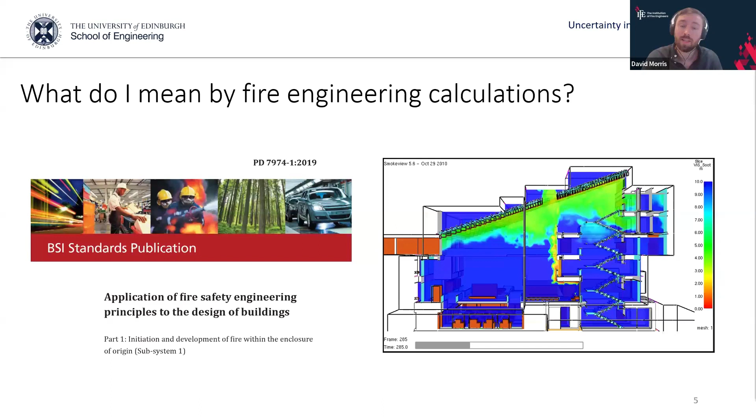So the idea today is to go through two broad categories of fire engineering tools. We'll focus one on what we'll call simple correlations or correlations and simple models, and in particular I'll be going through the example of flashover correlations. These are the kinds of things that you might see presented in codes and literature, but in particular we'll be looking at flashover. And the second category being largely what we'll call complex analysis, such as what are the inputs that we use for something like a CFD model.

In particular, we'll be looking at the variability in heat release rate data as an input to additional analysis. Everything I'm presenting today are tools that I've used in some capacity with some experience as an engineer. And then I've also had the opportunity to now get a bit of a research perspective in terms of laboratory experiments. So hopefully this is an intersection between the use of these tools as an engineer, but also a bit of experience looking at it from an uncertainty and research perspective.

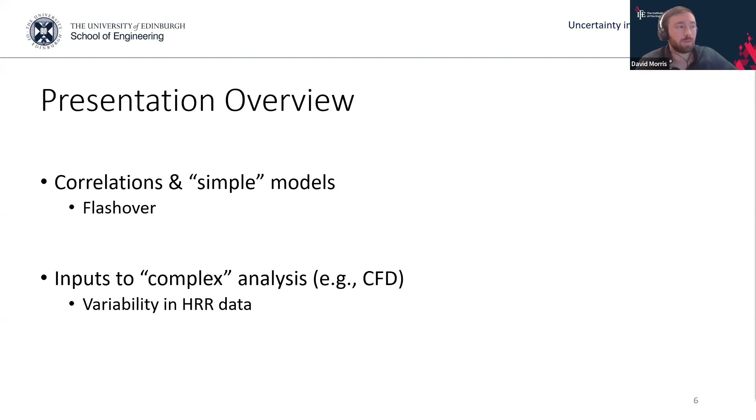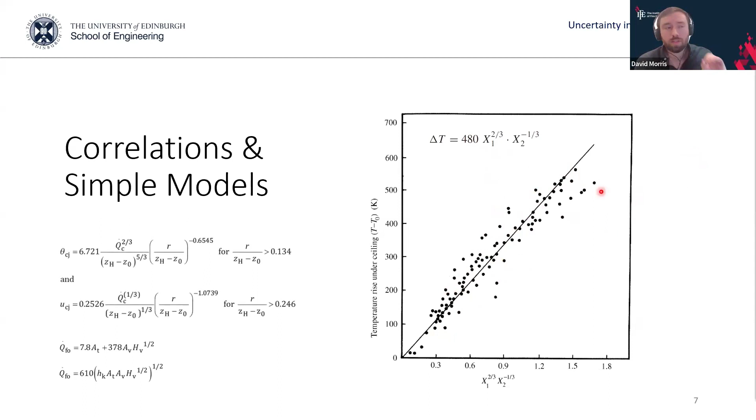And so if you recall some of the examples that I referenced from BS 7974, there are other kinds of correlations that we might come across, right? So now let's actually look at this degree of scatter around some of these correlations. Let's try to quantify something like an error bar on one of these correlations.

And today we'll be focusing on the concept of flashover in terms of this correlation. And I'm sure many people here are very familiar with the concept of flashover, but flashover is that sort of proverbial transition from a room in a fire, a fire in a room, to a room on fire, right? And what that means is basically you go from a localized fire, usually a single item or a few fuel packages burning, and then based on the ventilation conditions of the room, you eventually transition to a point where all of the fuel in the room has ignited.

And so the process of flashover is controlled by this complex interplay between the ventilation conditions and the development of a smoke layer, which acts to heat the remaining fuel in the compartment. And we won't go into too much detail about the interplay of all these different phenomena, but on a simple level, we can say because flashover is linked to this idea of ventilation, you are able to then predict the onset of flashover by identifying this ventilation factor.

Now, the benefit of the ventilation factor is that this is based on the geometry of the compartment alone. It has nothing to do with the fire inside the compartment or the fuel inside the compartment. It is purely a function of the openings of the compartment, right? And so this is a useful tool in correlating the onset of this flashover.

And the output that we're going to be looking at is we like to look at this threshold flashover using the fire size, right? So that's, again, the heat release rate, probably terminology that many people are familiar with. It's your fire size, right? It's the rate of energy release. It's in units of power. It's the kilowatts, megawatts of the fire.

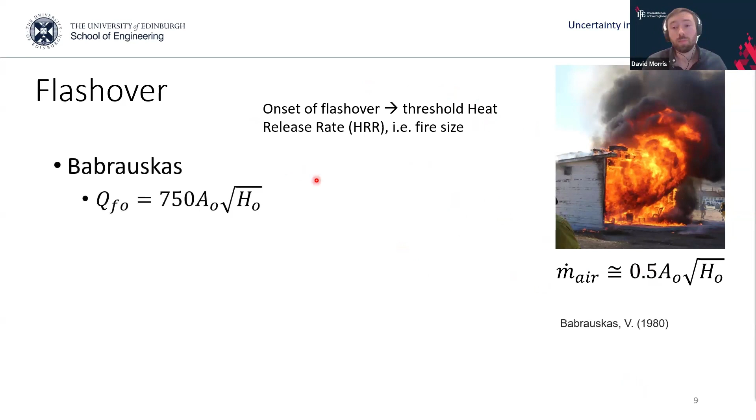And so there are simple correlations that exist that correlate the onset of flashover in terms of a heat release rate to this ventilation factor. One of which is the correlation presented by Babrauskas, as seen here as a simple sort of linear relationship between your ventilation factor and the heat release rate at flashover.

You also have the MQH correlation, a very similar formulation. You see the ventilation factor nested in it with a few other terms, and you have the Thomas correlation. Again, in each case, you see the ventilation factor sort of cropping up in the correlations themselves.

I've used the Babrauskas correlation, for example, in a few projects in the US and Australia. Also, the MQH and the Thomas correlation are both referenced in BS 7974 as potential methods for looking at the flashover potential of a compartment.

Now, irrespective of the differences between the correlations, right? Let's just look at, for example, the Babrauskas correlation alone. Just looking at this correlation, right? You can theoretically put a single input into this and get a single output, but looking at the equation on its own doesn't give us any fundamental insight really into what's my level of confidence in this output, right? I have one input, I get one output, right?

But what are my error bars on that? Do we have an idea of what the range might be? What limit do I have on putting a ventilation factor in here to begin with? Can I use this for all size compartments? Is there only a certain range of compartment sizes I can use this for? So these kind of questions start to crop up as we start looking more and more into these equations.

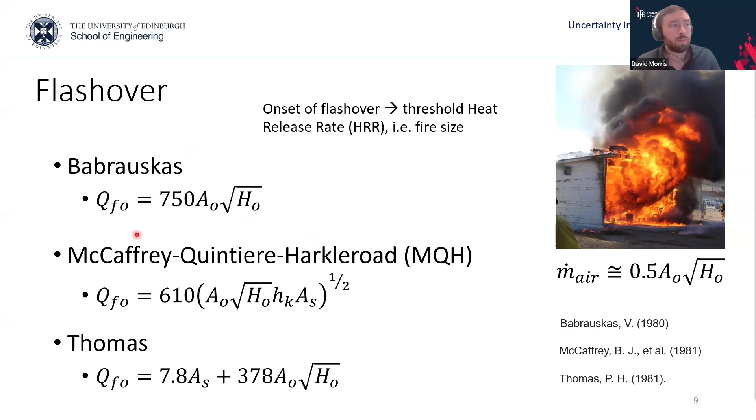So let's break down the Babrauskas correlation a little bit in detail.

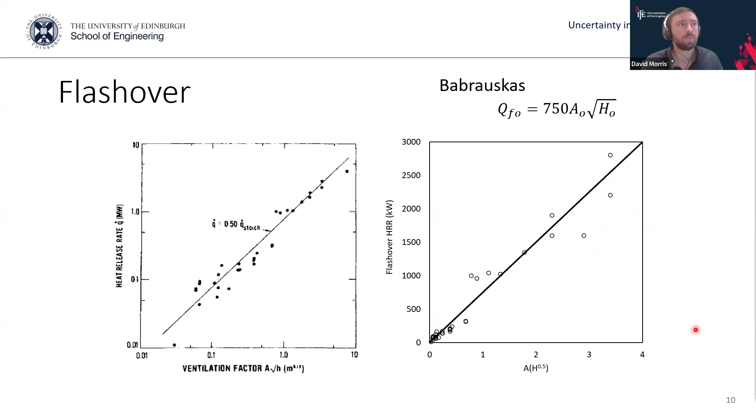Now, I'm going to break up the idea of uncertainties into two categories. The first category is statistical variation, right, these are the error bars I've been talking about.

As we can see, there's a degree of scatter around this correlation, and this can be calculated by taking a regression analysis of the data and the correlation, taking a 95% confidence interval between the difference of the data and the correlation itself. In other words, with 95% confidence, we can put error bars around the correlation and say that our original correlation has a plus or minus of about 520 kilowatts with 95% confidence.

There are multiple different ways that we can articulate these error bars, but this is just one approach. The benefit is that with the data, we can start to say these are the bounds of values we might expect based upon the experimental data, so we can actually start to articulate confidence in this calculation. So that's the error bars.

This is the second part of this uncertainty to look at. It's worth noting that this correlation was only determined over a certain range of ventilation factors, so in theory we have no idea what happens beyond the data that was actually collected. While there might be a physical basis to extrapolate beyond the ventilation factors that were experimented, without the data to back it up, the correlation is only as good as the range of values used to create it. So we have no idea what's going to happen afterwards without the data to back it up. The whole idea is to look at this as the range of ventilation factors that we can actually apply to this particular correlation.

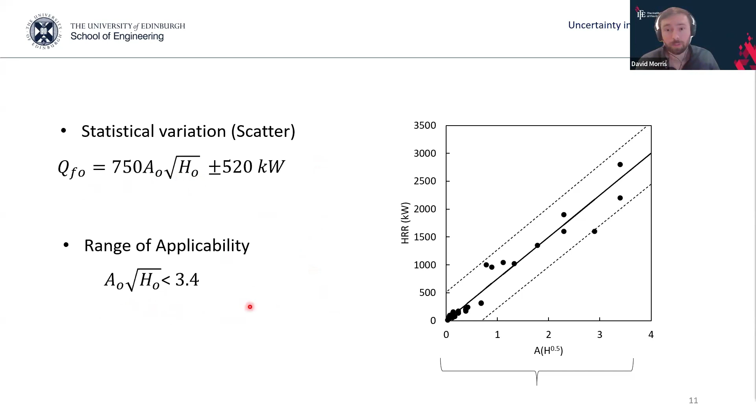By digging into the original correlation, we can start to articulate these ideas a little better. But let's not stop there. That's just the Babrauskas's correlation, but you remember there were 2 other flashover correlations that we briefly discussed that we could use in an application like this. So without going into a regression analysis for each one, let's quickly look at how all 3 of these stack up to one another if we want to plot this on top of the data we're looking at here.

Recall that each of these correlations are fairly similar. There's a ventilation factor nested in here somewhere that gives you the heat release rate at flashover. Then there are a few other terms which effectively represent heat losses to the boundary of the compartment. But basically the only difference between the original Babrauskas's correlation, which just links the ventilation factor to the heat release rate at flashover, and these other ones, is we need to make an assumption about the size of the compartment to get the areas of the compartment.

If we take this figure, looking again at heat release rate at flashover versus the ventilation factor, we can take the original data from the Babrauskas's correlation and put the Babrauskas's correlation over it. Then let's play around with what the MQH correlation looks like for a 3 by 3 by 3 meter compartment, for example. This is what the correlation would produce. Similar general behaviors, but a different functional relationship between the ventilation factor and heat release rate at flashover. Still capturing quite a bit of the data, but if you were to put error bars on this, they would look different.

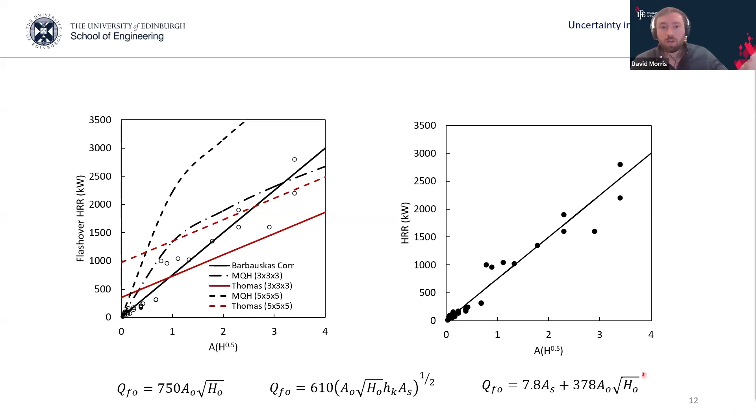Just to quickly recap, going back to the Babrauskas's correlation in particular, because that's the one we've calculated error bars for, let's recap where we're at. With 95% confidence, we can put error bars on this. So if I want to use this equation, I can say it's plus or minus some value, and we can use it within a range of, say, 0 to 3.4 for a ventilation factor.

Just to give some physical intuition behind what these numbers actually look like: something like a ventilation factor of about 1 is more or less a single door opening. So for a compartment with a single door opening, we're looking at a flashover heat release rate of about 1 megawatt. Recall that's roughly the peak heat release rate for something like an upholstered couch or a similar fuel package. On the other end of the range of applicability for this correlation, we go up to about a 2 by approximately 1.25 meter opening, these are approximate figures, but this is more like, let's say, on the order of a double door.

And that's the kind of range that we can go to with this correlation, right? That's the confidence level that we have. If we start extrapolating too far beyond that, now we're making an extrapolation. The same level of confidence cannot necessarily be applied to that without higher resolution in our data. So the combination of the error bars and that range of applicability allows us to actually articulate the confidence that we can place in that calculation.

And this idea can extend beyond just this correlation. Every calculation method that we can do, these two principles still apply: can we get error bars on our calculations, and do we know the limits to which we can apply this kind of calculation?

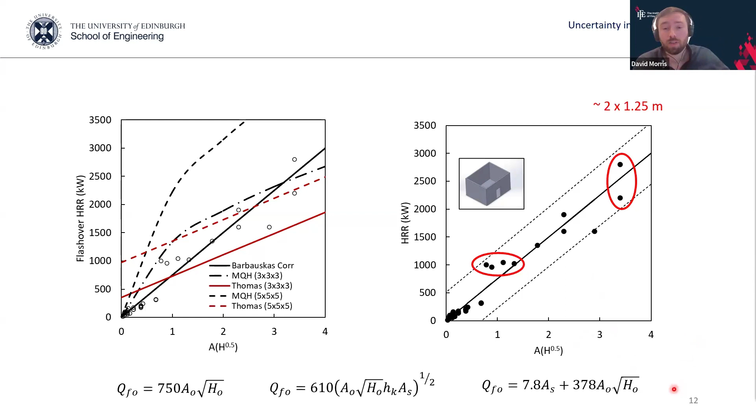So in talking particularly about the range of applicability, let's put aside the mathematics for a second. It's worth taking a moment and talking about, if we're looking at flashover, we're looking at this transition to ventilation limited conditions - what kind of compartments are we looking at? Can this be applied in any instance, I guess is the question.

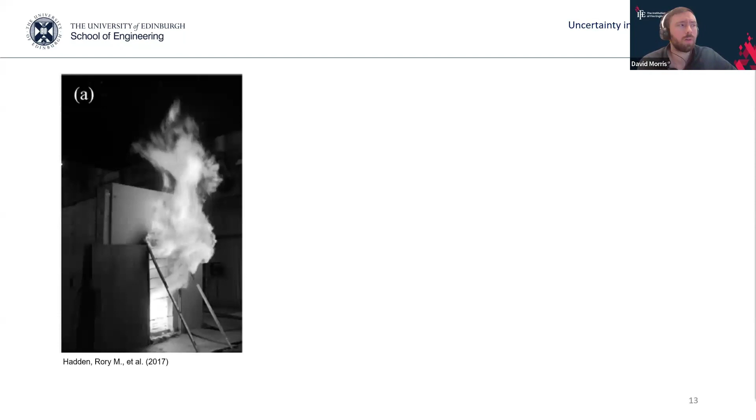And so this concept of flashover is most closely linked to the kinds of fires that we would call regime one fires, your sort of ventilation controlled fires, which is described in a lot more detail in the compartment fire dynamics literature. But that's not to say you can't get localized ventilation limited conditions in large open spaces - there's plenty of examples where we can see flashover-like phenomena in large spaces.

But let's go back to what we've been discussing - a very specific tool, the flashover correlation, which has largely been developed for these sort of boxy, regime one, smaller type compartment fires. So the whole concept of the correlation is applying it within the realm of applicability that we're looking at. And just because you can take the equation and, in theory, put in any ventilation factor...

There's nothing stopping me from taking that equation and calculating the heat release rate required to flash over a stadium, or an atrium, or very large spaces where the physics of the process of flashover no longer fully align with the calculation method itself. So beyond just looking at the graph and the data, it's also worth taking a second to look phenomenologically speaking - are we within the realm of what we think this correlation should be used for? That applies again to any calculation method we might be using.

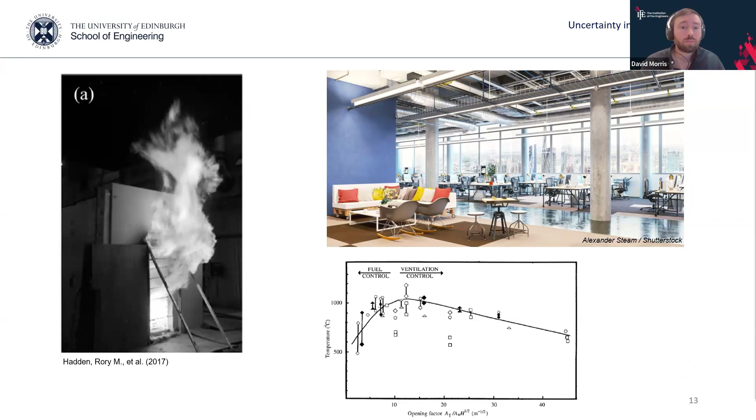So that was, we'll say, our simple correlations - simple inputs, simple outputs, so very deterministic, so to speak. Now let's move on to something that's a little more complex. What do our uncertainties look like when we are trying to put input data into complex calculations like CFD modeling, zone modeling, evacuation modeling?

The list can go on. But these complex models require a range of input parameters, and naturally the reliability and accuracy of our model outputs are going to be based on our confidence in our input data.

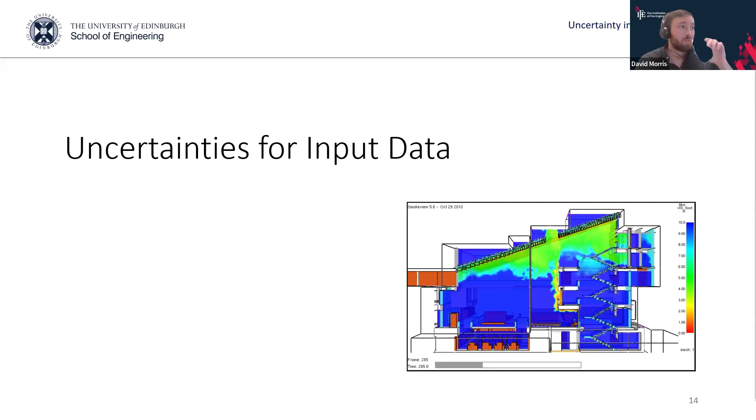One of the key inputs to this kind of analysis, like CFD modeling or two-zone modeling, is generally you have to choose something like a heat release rate. This isn't the only thing you have to choose for these kinds of modeling applications, but it's generally the heart of our design fire analysis. Many design fires are going to be based around the concept of the heat release rate - what is our fire size, how is that fire size growing, what's our maximum fire size - and all these things, the heat release rate, have many knock-on effects to many different calculation methods that we might use.

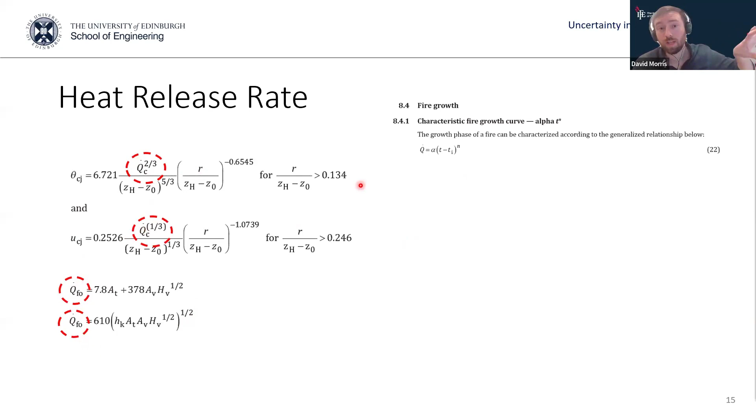So recall those calculations that we saw in BS 7974 - whether it's our ability to define the characteristic fire growth curve, or looking at things like ceiling jet correlations, or our flashover correlations, all of these have the heat release rate nested in there somewhere. So the heat release rate is an integral part of all sorts of applications, such as these correlations, but also it's an integral part of something like a CFD model.

Defining our transient development of heat release rate: how does it start, how does it grow, what's our maximum fire size? All those have significant implications to things like our modeling outputs.

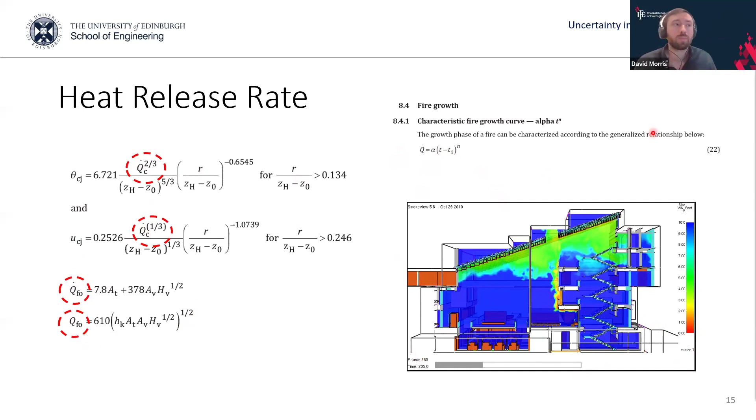If we're to choose a heat release rate to use in a certain application, we ultimately need to decide what is the design fire that I want to represent this particular scenario with. So our selection of a heat release rate effectively tells us this is the fire that I think is most appropriate for this scenario.

Whether we're using real experimental data or generalized fire curves based on assumed alphas and peak heat release rates, generally both scenarios end up making their way back to the concept of experimental data. Even the alphas we use or the peak heat release rates we assume, like the ballpark numbers such as the 5 megawatt fire that's a gold standard in certain applications, all come back to experiments that were conducted at some point.

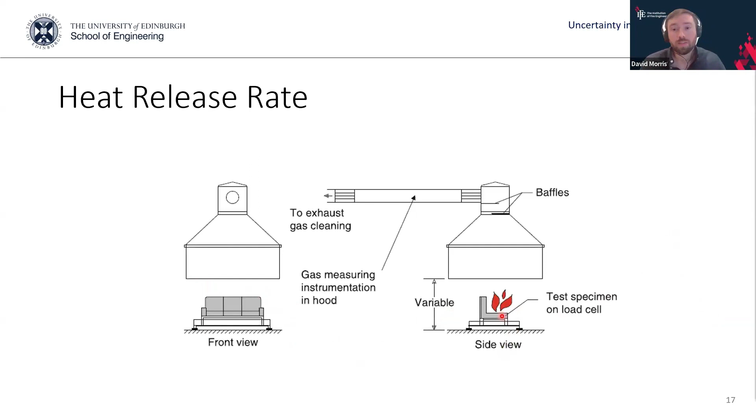We can use this as an input to things like calculating ceiling jet temperatures, or take it directly and put it into something like a CFD model. The power of looking at the heat release rate experimentally is we're able to get ideas of how big a fire we might expect for a specific fuel package.

I could take anything I want, put it underneath the hood, light it up, and we can see what that fire is going to look like. Then we can use that to inform design fires, assuming you have similar fuel packages in your compartment. Now, this is where the tricky part comes in.

While this is very powerful, and gives us the ability to say this is the kind of fire we might expect, what happens if I had ignited the couch in a different position? What if I had oriented the couch differently? What if I had added more pillows to the couch? All these different variables start stacking up - are we going to get the same heat release rate output?

If I was to preheat the couch, for example, assuming a compartment fire dynamic scenario of a smoke layer heating the couch, how does that change the heat release rate? If I'm putting this in my compartment, will it behave like this, or will it behave slightly differently? All these become very interesting questions.

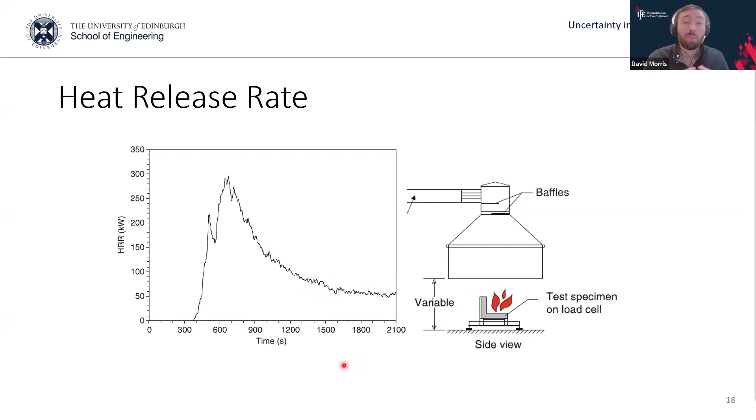This is a single seater, a very simple upholstered chair that we burned in our lab, and this is just the curve that comes out of it.

But what happens if I took that same exact chair in the same scenario and wanted to ignite it again? Because if I'm going to inform my design fires based on this fuel package—and again, some people might rightly think this isn't necessarily the largest fire you'd use as a design fire, so maybe I don't want to use this exact chair, that's a good point—but if we can extend this logic to any fuel package...

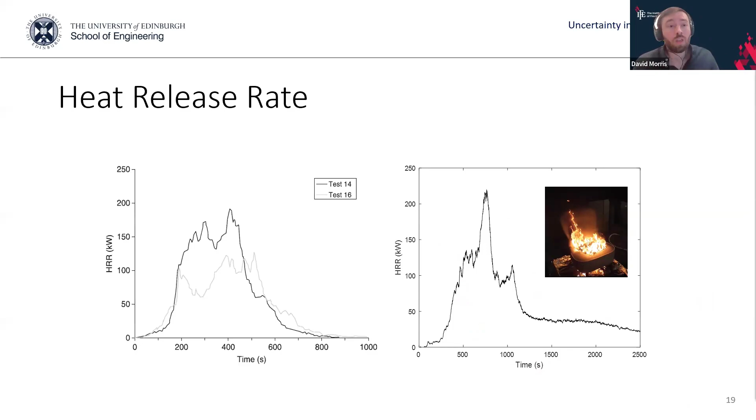Generally, if we're looking at repeat experiments, we only see upwards of about 3 experiments repeated. So what we wanted to do is go higher than that. We ended up taking the same fuel package and running it 25 times over and over again, same conditions, to look at what the variability looks like. So we ended up running a total of 25 experiments.

These are just a few of them, the same upholstered chair with a small Bunsen burner igniting it from beneath. As you watch these side by side, it becomes apparent that the fire behavior is different between these scenarios. Some are already reaching peak heat release rate, while others are still slowly growing.

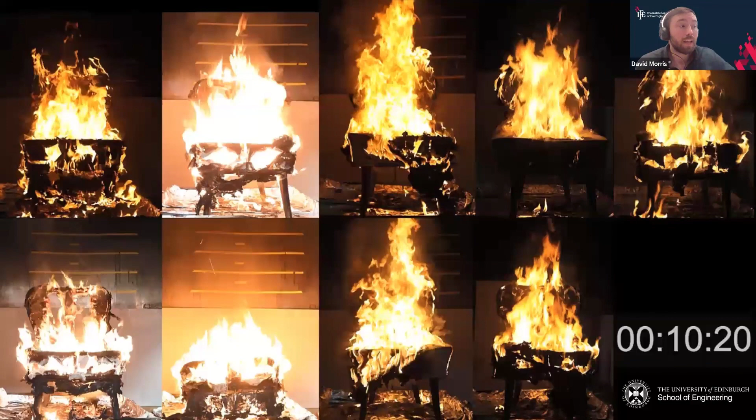So visually you can start to see these differences between the experiments, and that becomes more apparent as time goes on. Some start mechanically failing at different times, because these are actual upholstered chairs. So just by observing these side by side, you see the same fuel package, same ignition conditions, same experimental configuration, and yet there are differences over the course of time.

Now this is the results of the heat release rate curves of all 25 repeat experiments of the same item under our calorimetry hood, under the same exact experimental conditions.

Something I really like about this figure, and I like to ask people whenever I show it: is this more or less repeatable than you'd expect if I told you I was going to take an upholstered chair and burn it 25 times? I think it's an interesting question. If you ask many people in fire, they'd say, actually, I see some general trends - that's kind of impressive. But if you show this to a biomedical researcher, they'd be appalled at this being repeatable. But it is what it is, right? This is what the data show.

So I think it's fair to say there is a degree of variability. You can see, for example, there's quite a different range of growth rates of the fire. If you take any instant in time, say 500 seconds into this experiment, you have anything from a 50 kilowatt fire to a 250 kilowatt fire.

So on a time basis, there is quite a degree of variability here. But equally, I can also see some commonality across these experiments. There are different growth rates, but you have a growth up to the peak heat release rate somewhere here, and then a decay down at the end when the chair breaks down into a sort of smoldering pile of mess. So while there are distinct differences in time, you can start to see there maybe are some commonalities between the experiments. So how do we start putting things like error bars on this is the hard part, and we'll get into that.

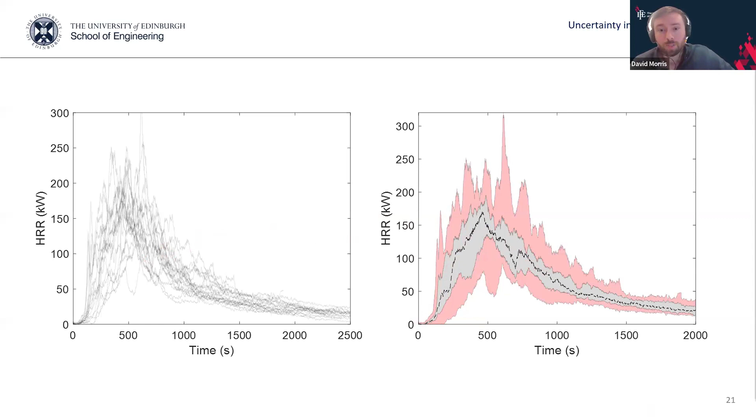If you were looking at this from an alpha t-squared sort of perspective, your alpha values are going to vary quite a bit.

And looking at the data set as a whole, you have alphas that range from sort of the fast growth rates all the way to sort of a slow growth rate in terms of the standard alpha values that you might choose.

And so there are significant differences in the time-resolved data between these two cases, right? You can see that becomes very clear.

But you can start to make sense of these differences if we actually link these occurrences not to the time itself, but if we identify key events that occur over the course of the experiment. Because the heat release rate is just the manifestation of how this chair happened to burn, right? It is linked to all these physical occurrences that happen over the course of the experiment. So instead, by just observing the experiment and marking these key events, we can actually contextualize these results a lot closer.

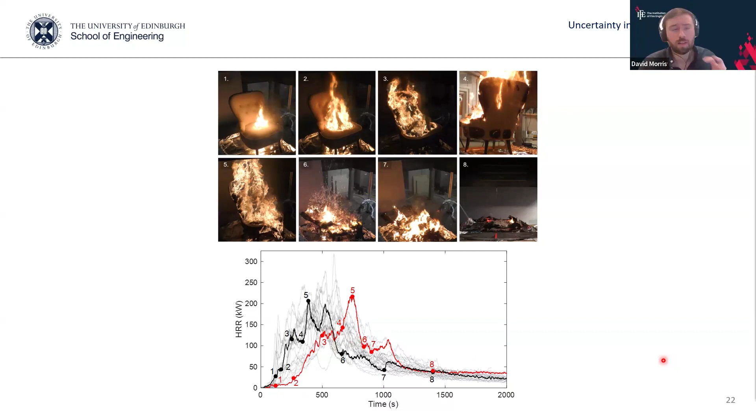And to look at this in even more detail, the dependence on this event becomes even clearer when instead of plotting the heat release rate as a function of time, let's now normalize it as a function of key events. So let's line up the heat release rate data as a function of all of the data points lined up for when the backrest ignites or when you get to your peak heat release rate.

And compared to that spaghetti plot of a bunch of different curves that we saw previously, now we start to see this is your median curve that's actually becoming characteristic of the individual curves that we see. This shows that what's actually driving this process is the physical mechanism of when you ignite the backrest, you now have a regime of upward flame spread. Therefore, you have a growing heat release rate up to the peak heat release rate.

And so by tying these to physical occurrences, we can better contextualize the variation that we see in time. And so this is specifically for this chair, of course.

But in theory, you could apply this to any fuel package. For vehicle fires, let's say we can identify the key events that occur in every vehicle fire, and then understand that's what's causing variation in the time-resolved data we might see. Once we have the data presented this way, you can take the distribution of when these events occur, and in theory you could probabilistically recreate any design fire you wanted. You'd vary when these events occur, and that will shape the heat release rate curve. That's just an idea you could apply not just to this fuel package, but any fuel package where you can identify the relevant key events and leverage that to probabilistically recreate all the possible outcomes of the heat release rate curve. That can apply to any fuel package, not just this chair.

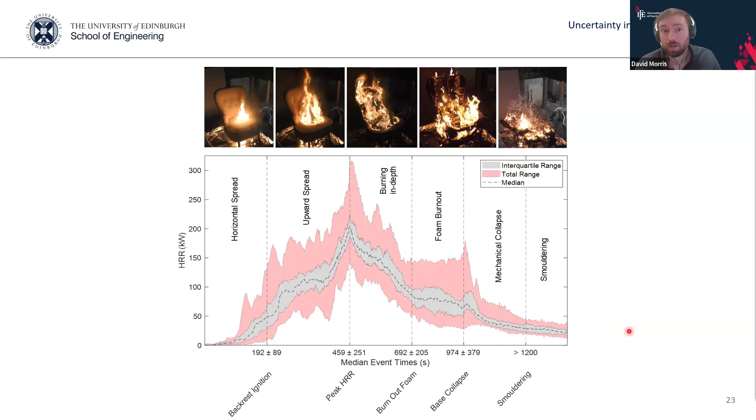If you're interested in hearing more about the work we did on the variability in heat release rate data, you can check out our recent publication in Fire Technology, or listen to a podcast interview that Wojciech Węgrzyński was kind enough to invite me on for. There's much more information about this study in those two sources.

But in terms of our discussion here, where does this stuff with heat release rate variability leave us? Let's tie this back to the idea of uncertainty. The idea of basing heat release rate off events, and normalizing things based upon events, is really interesting for contextualizing the physical drivers of the burning process and how we contextualize some of that variability. But at the end of the day, as engineers, we need a heat release rate curve that's a function of time—we need to put something into our calculations.

Maybe this chair isn't necessarily going to be the basis for all of our design fires for the scenarios you might think of, but what does the insight of this variability tell us about the design fires we might choose? We've already discussed that taking an average through this is maybe not the way to go, because you'd very significantly underpredict the peak behaviors and growth rates of any individual curve you might see.

From a completely different approach, you could envelope the entire thing—just take the maximum values. You could do that in theory, but in doing so you're no longer physically describing this particular fuel package. So by doing that, why even use this chair at all? You could just go to an assumed peak heat release rate. The question of which of these design fires to choose is really interesting, and I don't know if I have the best answer to that. I'd be very interested in having this conversation in the Q&A, or if anyone wants to keep chatting about this afterwards.

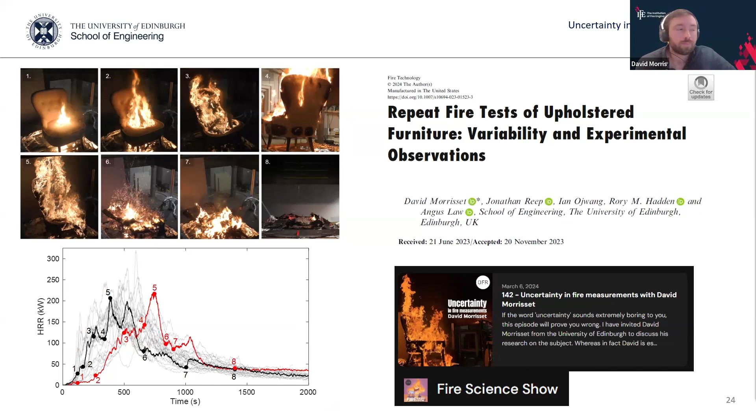Now tying it all back to where we started this presentation, the reality is modeling the interactions between fire, people, and buildings is complex. And it is the role of the designer to identify these uncertainties and adequately mitigate any risks associated with those uncertainties.

So ultimately, I think there's a couple takeaways. One, there is intrinsic variability in things like this heat release rate data, or in the variability in the outputs of even simple things like correlations. Recall the flashover correlations, where simple inputs and simple outputs, but if you go back to the original data set, there is a degree of variability on that. So there is intrinsic variability in the things that we do.

Nothing's perfectly deterministic, and therefore we can account for these uncertainties. But an uncertainty isn't just a question mark or something that we don't want to talk about. It is a tool by which we can convey confidence in the outputs of our analysis.

And so since there's variability on things like our inputs, there is going to be variability on our outputs. So articulating the variability in things like a heat release rate curve for a design fire goes a long way for quantifying what is our confidence in our outputs of something like a CFD model, for example.

Unfortunately, we don't have a lot of databases for large heat release rate experiments for things like this, and lots of repeats. So hopefully it's something we can get more of in the future, just as an ability to articulate what kind of range of variability might we expect, and how does that variability start to change if we change ventilation conditions or the experimental configuration in which we're conducting these experiments.

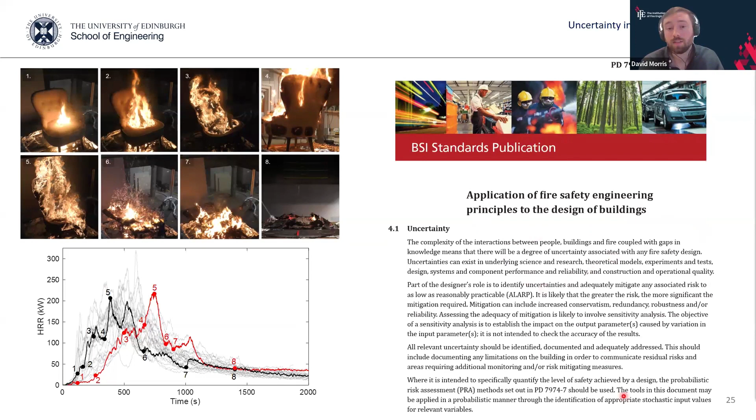So being able to articulate these things, I think, is what is meant by understanding these complexities and uncertainties in our kinds of analysis.

So tying it all back to where we started, there's tons of different bits of analysis that we might be able to do as fire engineers, but our ability to articulate uncertainty is a tool by which we can convey confidence. And at the end of the day, all models are wrong, but some are useful. We as fire engineers have to use tools at our disposal to protect people and property from fire. But I think the key aspect that hopefully we can do as a community is be able to identify and articulate our confidence in the outputs of any given analysis.